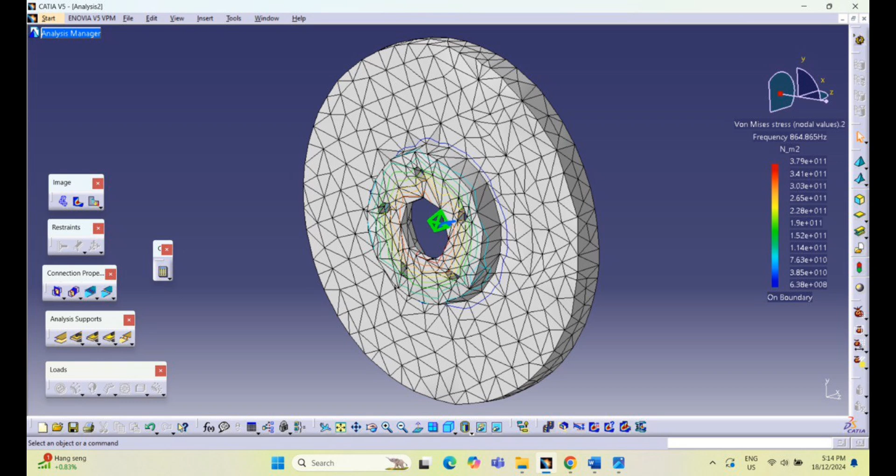This picture describes translational displacement vector. The value is, we take the highest, so the value is 278 mm.

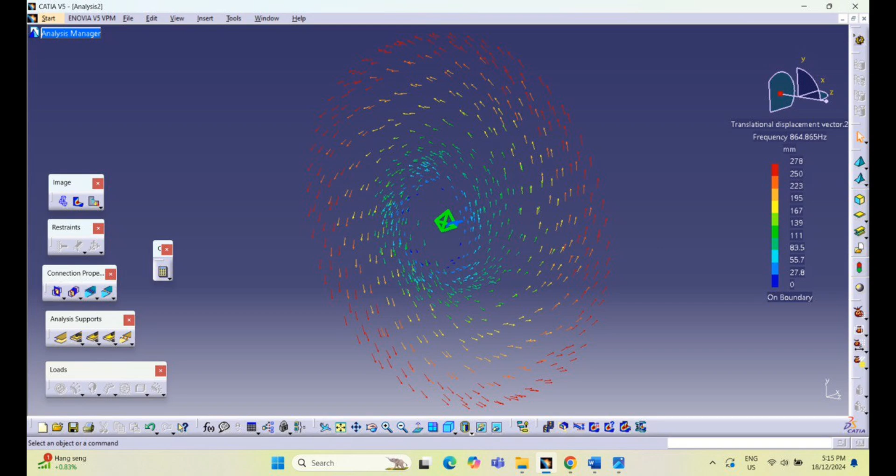Okay, this is our material table. For the properties, material that we use is iron. Next, the Young modulus is 2.11E+011 N/m². The Poisson ratio is 0.291. The density of iron is 7870 kg per meter cube.

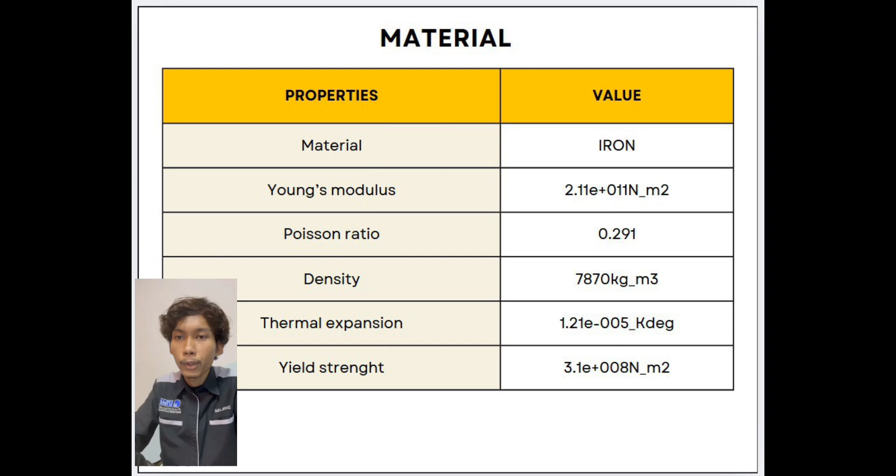The thermal expansion is 1.21E-005 per K degree, and lastly our yield strength is 3.1E+008 N/m². This is our table of result of analysis.

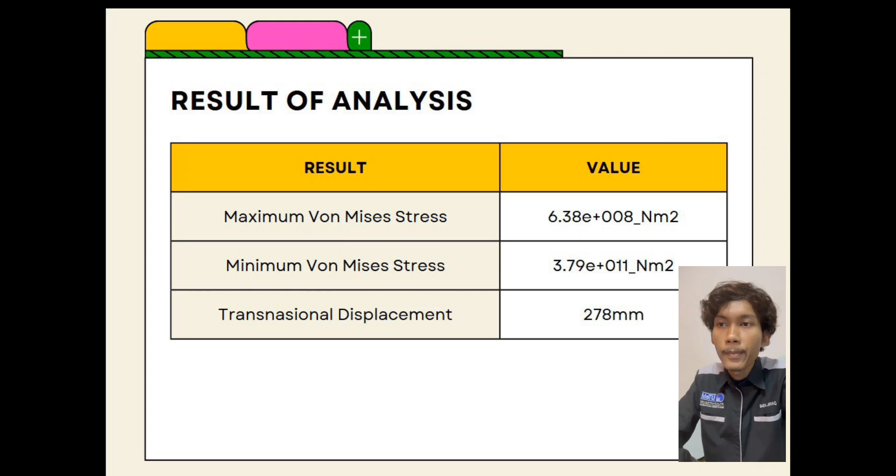The maximum von Mises stress is 6.38E+008 N/m². The minimum von Mises stress is 3.79E+011 N/m², and the translational displacement is 278 mm.

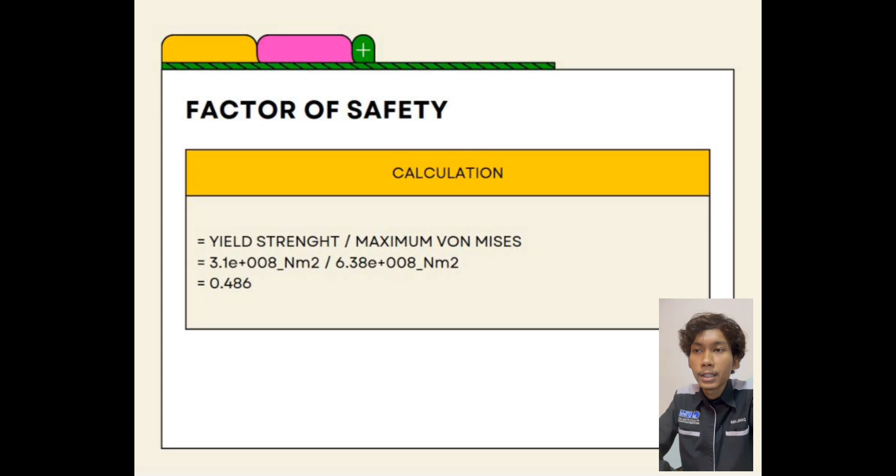This is our calculation of factor of safety, yield strength over maximum von Mises stress. So we got factor of safety in this experiment is 0.486. This is our discussion.

From the analysis result in CATIA, the maximum von Mises stress value is 6.38E+008 N/m², and the minimum value of von Mises stress is 3.79E+011 N/m². The maximum von Mises stress is more than the yield strength value, so this will not be safe against the load applied. The safety measure of this rotor is

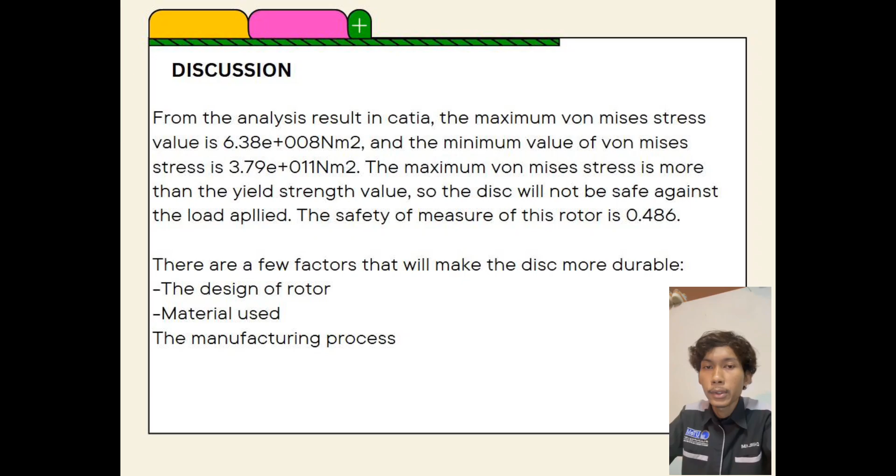0.486. There are a few factors that will make the disc more durable: the design of the rotor, the material that is used for the brake disc, and the manufacturing process. The conclusion: a brake disc used in a high-performance vehicle, for example, must have a higher safety factor than one used in a typical daily driver's car.

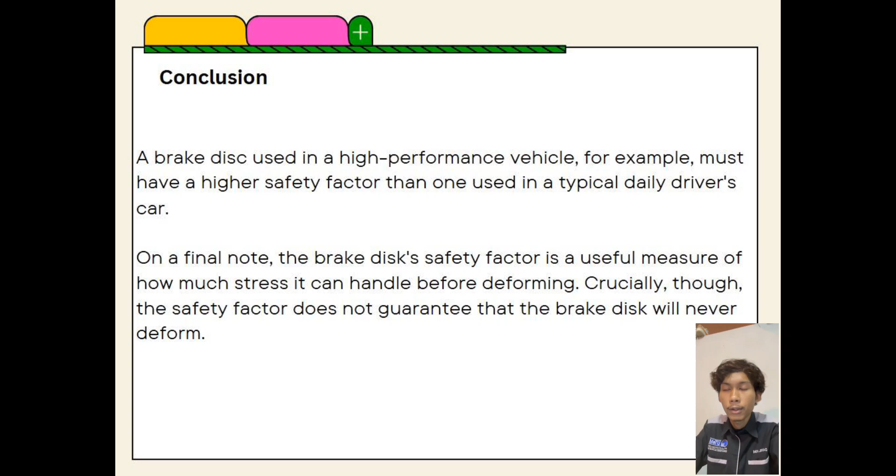On a final note, the brake disc safety factor is a useful measure of how much stress it can handle before deforming. Crucially, though, the safety factor does not guarantee that the brake disc will never deform.